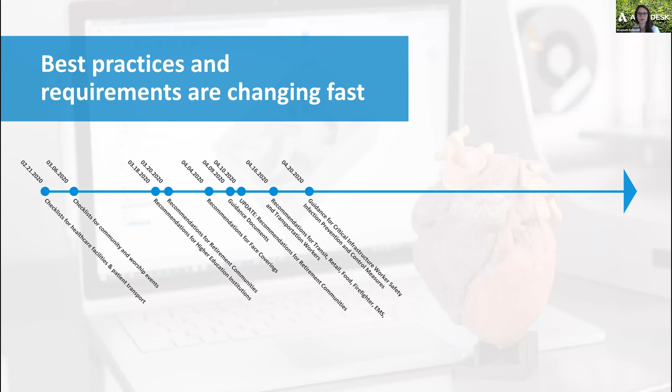So to start, one of the biggest issues in the AE industry, in addition to everything going on right now with COVID, is not only that requirements are changing, but that they're changing fast and they're changing often. So these are just a few of the recommendations set forth by the CDC. And as you can see, the recommendations are being updated regularly, and the recommendations vary by industry. So it's a challenge to keep up with all of the data.

The design and construction industry has a presence in some capacity with all industries and typologies. So this is really creating an overload of information and an endless cycle of modifications. So the big question really is, how do we adapt to face the challenges ahead?

And first, it's about understanding what we can do. NIOSH has released a hierarchy of controls as it relates to hazard prevention that narrows from the most effective to the least effective. However, as our industry does not have the knowledge or background focused on eliminations and vaccines of the virus, and it's not something that we want to find a substitution for, what we're going to be focusing on is how processes and tools can be implemented to help with engineering controls, administrative controls, and providing PPE. So as we work through the session today, we will be showing how various workflows and tools support meeting these control measures.

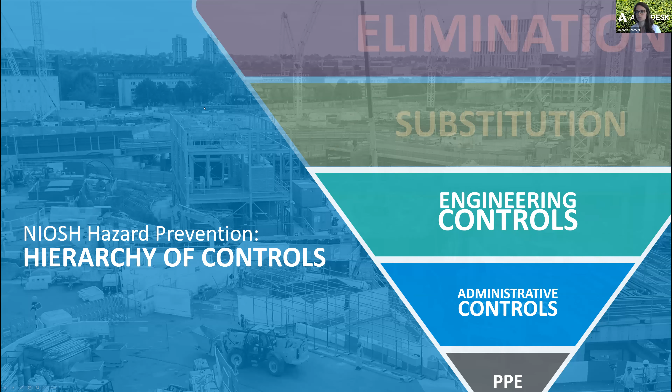Next, we need to establish an efficient method of working. We can be successful by taking the right references and resources as issued by varying agencies such as NIOSH, CDC, OSHA, WHO, AIA is coming out with things, and many more, and putting this information into a sustainable process. A sustainable process is going to be one that's repeatable, one that will help drive efficiency, and one that's going to lead with data decisions and give you analytical insights. Science is dictating a lot of design, engineering, and operational requirements, so we need to be able to make these decisions and push the design based on science.

We also need to support our processes by having the right tools. So in order to meet the requirements of driving decisions through data, the tools must support data inputs. It's also going to be in your benefit if you're operating in connected platforms, so you maintain data integrity and avoid rework as you complete your work cross-industry.

So before we jump into the processes and tools, I just want to set the framework for what we're about to explore. We're going to be looking at one project and exploring how 4 different tools can support redesigning for safety from the design phase all the way to facilities and maintenance.

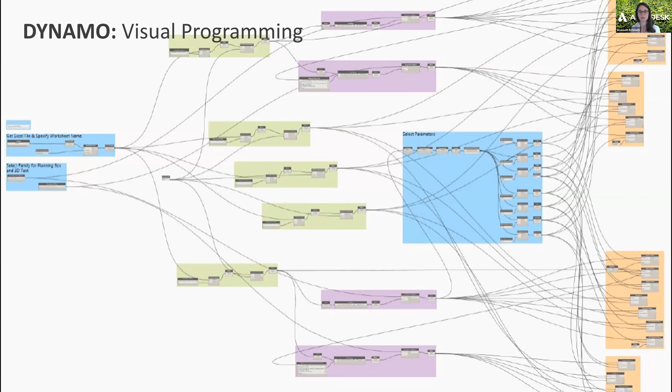This process relies on programming to translate the data. Dynamo is Autodesk's visual programming language, and historically running generative design studies meant users were working solely within Dynamo. However, in the AEC Collection of 2021, Autodesk introduced a new tool, the Generative Design for Revit tool. It's really just a user interface that allows designers to run generative design studies without having to engage in the programming interface and all of the programming language we just saw.

So this user interface is what we're going to be looking at today, in order to understand how generative design can meet the needs of redesigning for the era of COVID.

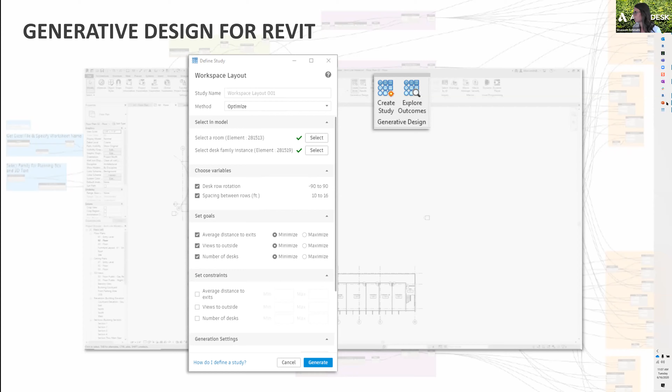Now I'm going to jump over to the product and we'll take a look at how this can operate. What I have open here is just a typical office building with a floor plan. I've opened up my FF&E plan, and you can see I have absolutely no furniture, fixtures, or equipment. So I have to redesign based on the new criteria.

There's a lot of rooms, it's multiple stories, that can be a pretty big task, especially when information is constantly changing. However, under this Manage tab, you can see Generative Design. It's grayed out right now because I have it already launched, but this is the new tool that will make this a lot easier for you.

When you open it up, you have the option to create and select a study type. These are all out of the box, included with the download and install of Revit 2021 from the collections. I'm going to show you how we can take the workspace layout and modify it based on COVID criteria.

So I'm selecting this workspace layout, and you can see it's really just a series of prompts. I can give this a name, so it's going to be office layout, we'll do it for Office 302. And I select a method — I'm going to leave it at the optimize method, which will try to optimize all of the different options based on the inputs.

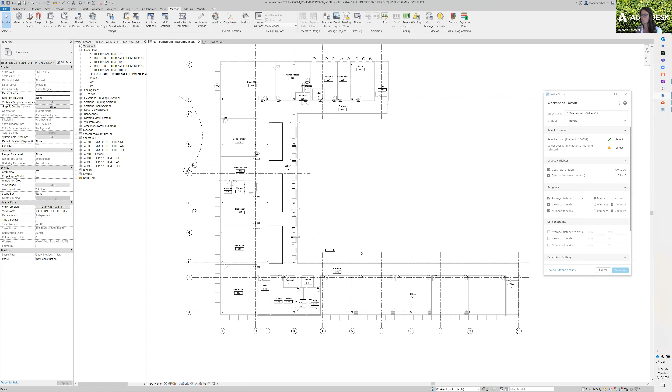Now, when we think about how this operates in the era of COVID, I know that this script and algorithm, just from working with it before, is going to create a benching layout — stacking these desks end on end for high density. And when we think about safety and social distancing, that might not be something we want.

So we have a couple of different options for how we can work with this. The first is we can modify the script. Everybody is going to have access to this — if you have the generative design tool, you have access to the algorithms it's running on, so you could go in and edit it.

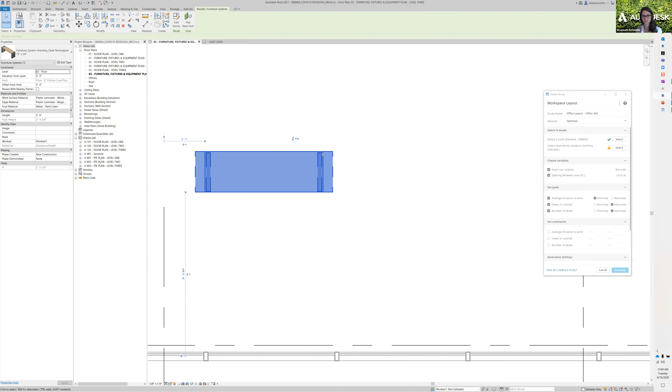The other option is just to edit the family itself. That's what I've done here — instead of just pushing the desks end to end, I've built in a clearance area for this desk, so there's a little bit of space added to the end of it. Now when it's end to end, I know I have that buffer zone. That's an easy way to still use this without modifying any of the programming, but still get a little bit of extra space.

So I select this desk, and here I have some variables. I'm going to leave these checked, because sure, we can rotate the desk row orientation, and yes, the spacing between the rows can vary. And we're going to set some goals.

Previously, when we talked about average distance to exits in architectural terms, it was something you might want to minimize just for ease of access and user experience — travel distance and egress paths. We want those to be lower.

However, when we now think about this goal in the era of COVID, an exit is a point of high touch. It's a lot of traffic, there's a lot of people going in and out, so you might not want to be close to it. So we can use these goals and these constraints to help us modify that.

Before, like I said, we might have wanted to minimize it. Now, maybe we don't want to minimize it, but maximize it, and refer back to the references and resources on what they recommend. So maybe we want to minimize it, but no closer than 15 feet for the average occupant, or maybe no closer than 10 feet, whatever the industry resources recommend for the industry you're working on.

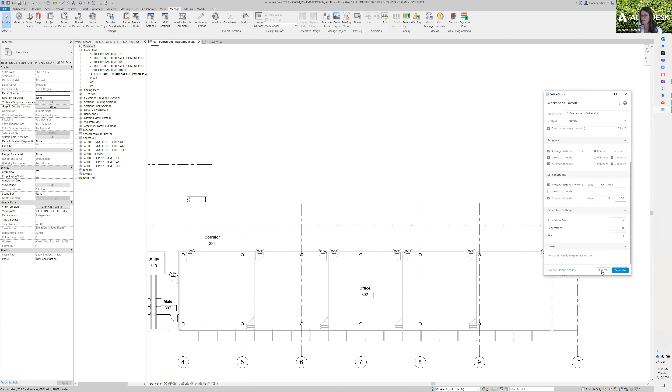From there, I'm really just going to tell the generative design tool how many different plans we want, and hit generate. It will take maybe 2 to 5 minutes to come up with the options, but because we're trying to show you 4 tools in an hour, we're not going to spend those 2 to 5 minutes. Instead, I'm going to cancel out of here and look at some of the studies I've already run. So this is the same office layout, and you can see I have 30 different plans, and I can sort these by average distance to exits.

Right now, let's sort it by the highest average distance to exit, because we want to start with people farther away and move down with people closer. I could also sort it by the spacing between rows. Same thing, let's look at the rows that are farther apart first, and then explore some options that are closer together. That's one way that we can start to look at this.

The other way, and this is where we start to talk about that optimization aspect, is when I come to the bottom here, I can filter all of these categories. Again, distance is king right now, so maybe I only want to see the rows that are farthest apart. Once I apply that filter, it's going to remove all other options. And again, average distance to exits - I just want to see the ones that are farther from the exits. Those 2 simple filters leave me with 2 options left out of 30 as being my best performers.

When I click on these, I'm going to get all of that data and reporting that went into it. So I can see what the average distance to the exit is for a worker, and I can also see my number of desks. So I'm about 14 feet away and I have 39 people. This option, you can see the average person is farther away from an exit and I have more desks. So we can make a decision based on this information.

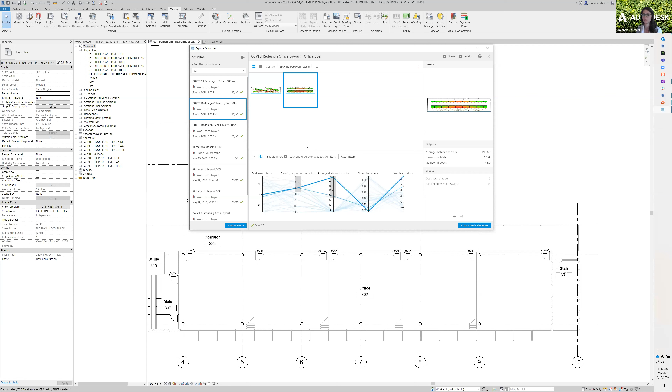The other benefit we're going to gain from generative design as we start to redesign a lot of spaces and do a lot of layouts is I can look at this room very quickly with an algorithm and see what works. I can also look at this room again with these operable partitions closed using that same algorithm and start to explore these options.

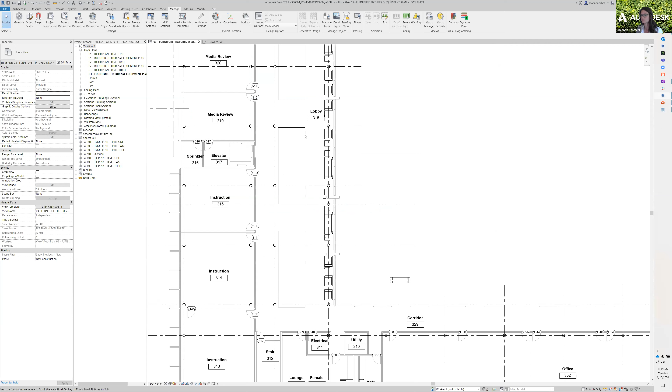And not only this room, but I can look at every single room in this office building. So this open office over here, I can generate layouts using that same technique, filtering down, understanding how each option performs, and quickly generate new layouts that are going to have those controls in place.

All right, so now we're going to look at the next step, and I'm going to give it to Edmundo, who is going to show us some of the other considerations that we need to look at instead of just where people sit, but how people move.

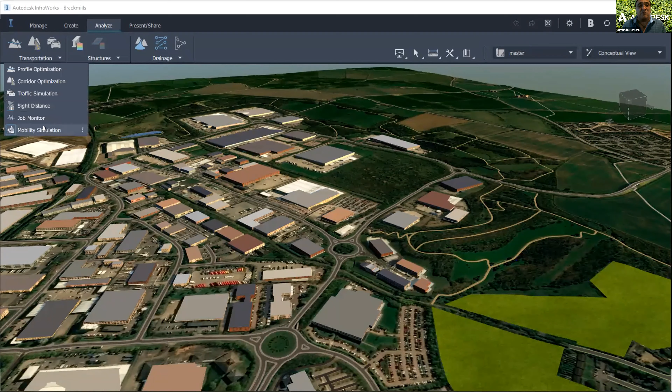So if you're familiar with InfraWorks, you just build a model of what you're interested in. If you don't have the data, you can automatically select a part of the world, and it's going to give you the basic configuration where you can import the model that Shannon was analyzing. Then from here, under InfraWorks, you go to Analyze, straight to Mobility Simulation, which takes you right to the area that you want to start analyzing. Again, you have to do this.

You have to use micro simulation. This is based on the gap acceptance lane changing algorithm. You have to really plan ahead on how people are going to be moving into the building, what times, everything.

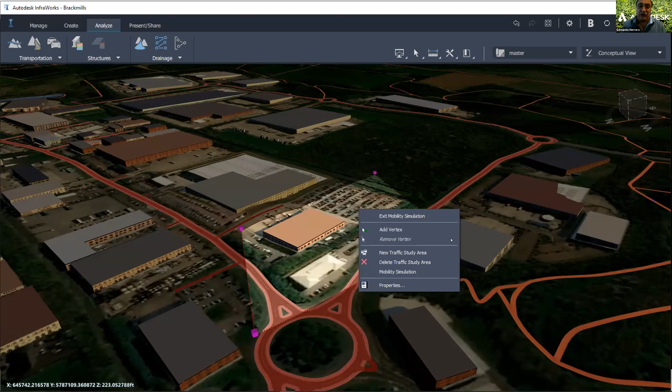Having said this, all you have to do is right click and move to mobility simulation. Once you do this—and I am importing a Revit model into the InfraWorks model—go straight, you can see it right here up at the top. It's mobility simulation, that's where it is. And then there's no restrictions whatsoever.

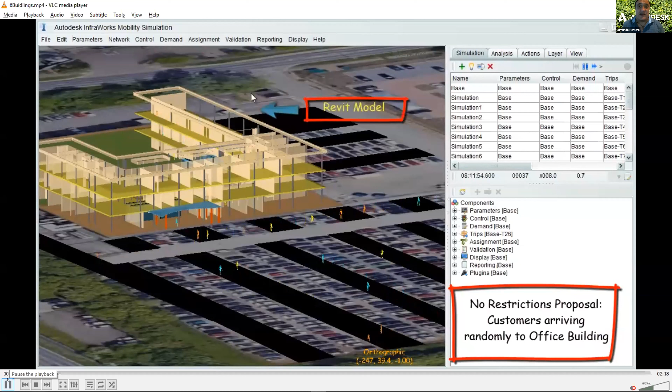It is always best practice in micro simulation to know the existing conditions. So we're going to be studying right now only the existing conditions, the way people randomly arrive into a building. We'll move into the safety guidelines provided by CDC in a second, okay? But it's always great to understand what happens. So this is just, at random, a Revit model, but it's far from being just pure graphics.

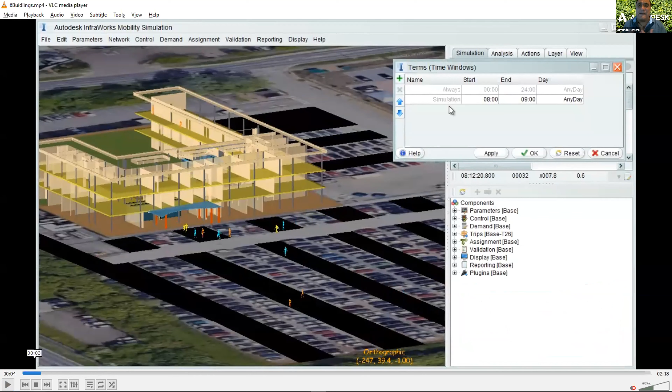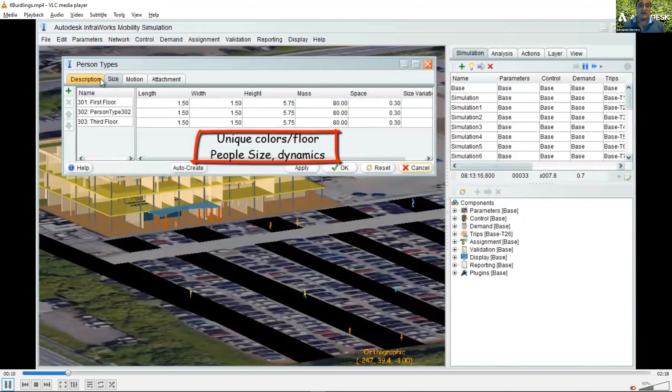These are very complex math done in a very simplistic way where you can immediately get results. That visual feedback is exactly what you're after. Look at this—you're modeling, and under existing conditions, people arrive from 8 a.m. to 9 a.m., and that's what you're seeing right here. Then what am I doing to understand the behavior a little bit better? I'm assigning unique colors per floor, so people on the first floor will have different colors than the rest of the floors. So you have all the physics, the length, the width, and the spacing that you want to do.

It has a south entrance—Shannon showed it—and a north entrance. Once you start running simulation, you can see all the results being dynamically updated, okay? Here, using the Revit model, I can even change views and start analyzing as people move in. So the information can be globally understood from the dynamic output report, or you can even select an agent, like I'm doing here, like a person, and it tells you exactly what is the waiting time, what is the walking time, and the type of person that's arriving at any point. So they're graphically dynamically updated.

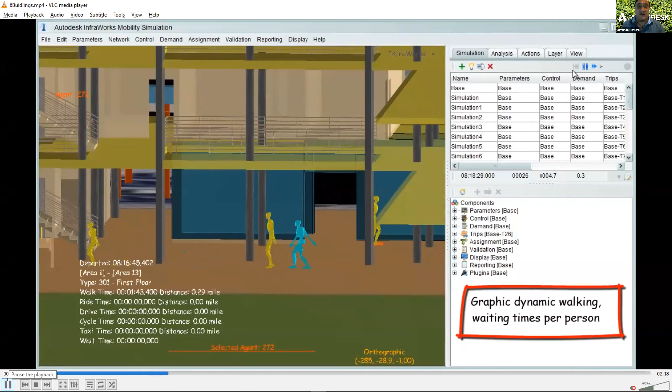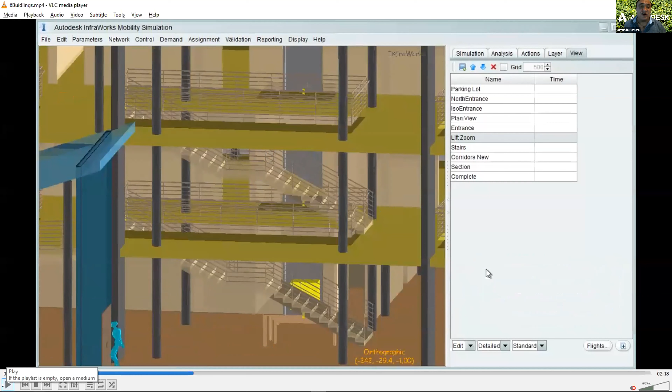Now you can even take it a step further. Based on the Revit model, you can also include elevator simulations. It includes the passengers, the capacity, when is the next trip going to be scheduled—every single element that relates to the elevator, you can see it. And then right here you simulate, and you start seeing people getting off on the second and the third floor.

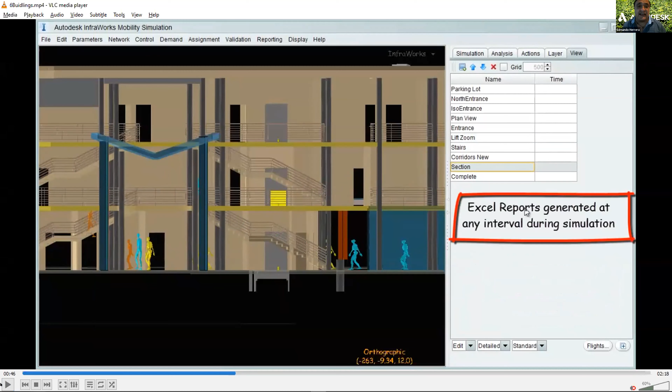So these are the existing conditions. And of course, not only the visual feedback—the immediate visual feedback you can obtain from simulation—you can also create and generate Excel reports. Once you do that, at any interval, you can certainly do it.

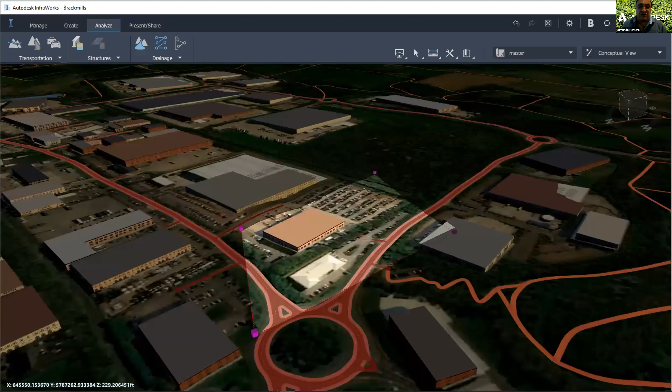Now this is fine, this is great, but what happens—let me go straight to the micro simulation, and this is the product itself, live demo. These are the new conditions, the new safety guidelines. So rather than people arriving randomly, what you do is right now establish different terms.

Since I cannot just—running the simulation based on the existing conditions, you can see people already not honoring the social spacing. So what you must do is plan ahead.

So I've got different schedules per different floors. I'm going to make some arrive before, and then for how long must you do it? So you have to understand that you have to organize the groups, you have to stagger them, and that's called computing the frequency on how often the groups would be released. So the staggering schedules you have to compute, and they must always be validated for.

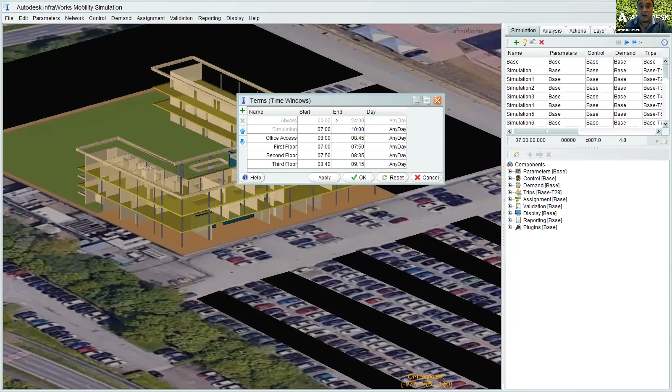Again, under here you've got your own type of person, first floor, second floor, and again we set the physics—what is the length, the width, the height, and of course the spacing. But once I hit the spacing, this is critical because now I must honor it.

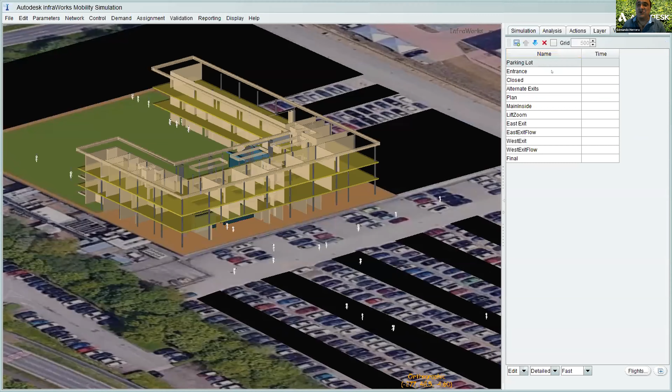And then you can even start running the simulation, look at the clock, and instead of 8 a.m. to 9 a.m., it starts right here at 7 a.m. As soon as you hit play, you can start seeing the first floor being occupied. Now here, if I switch to the entrance, I can zoom in and keep on playing the simulation.

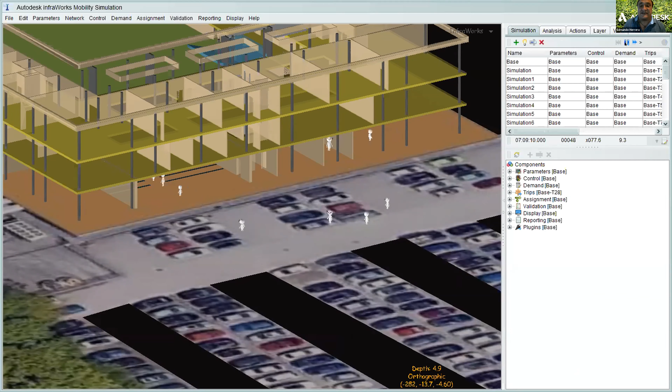Look at this, now they line up. You can't get exact ingress times just from door capacity, you have to compute and align them in a single line right now in order to have control and honor social spacing. Once you do that, you can start seeing them separating themselves. Okay, that's the entrance.

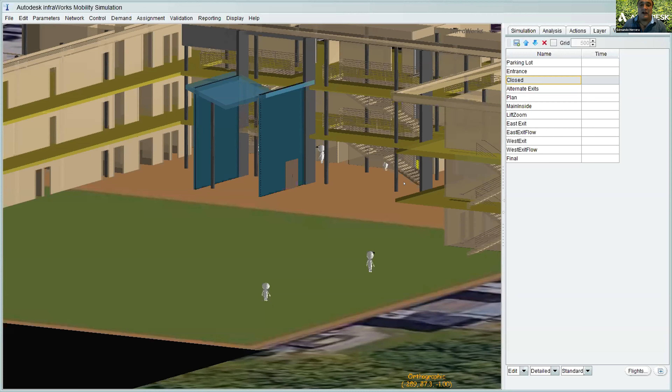I also wanted to show you this: as part of the new security guidelines, you must always avoid two-way traffic whenever possible. To do this, I leave the south entrance open but shut down the north entrance to avoid two-way traffic. Once I do that, I also open these two wings, the exits on both wings, so that people on the left wing occupy only the left side of the building, people on the right wing only occupy the right side, and the main entrance is open for the front part of the building.

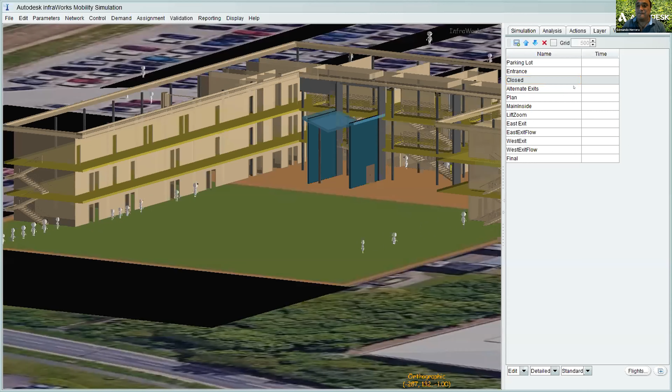So if I simulate, I can even slow them down. Once I do that, these are the alternate exits. And of course, if I see it on a plan view, I can see that stochastically, meaning based on probability of demand, not everyone's going to be arriving at the same time. I can certainly understand this.

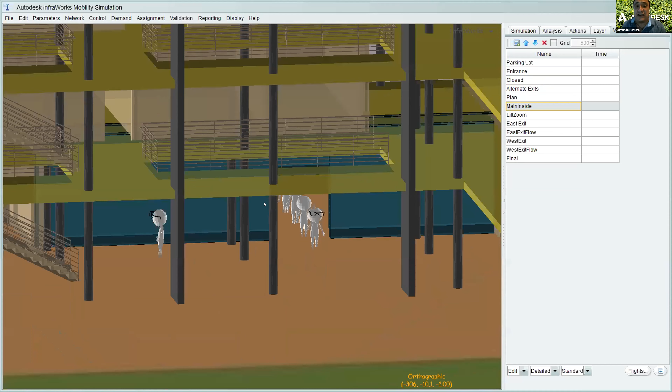On the main inside, look at this. You can even import your own 3ds Max characters into the building. It doesn't really matter the way they look, they look fine, but the physics and the mathematics are maintained here, which gives you the walk-in time, the waiting time, and everything in between.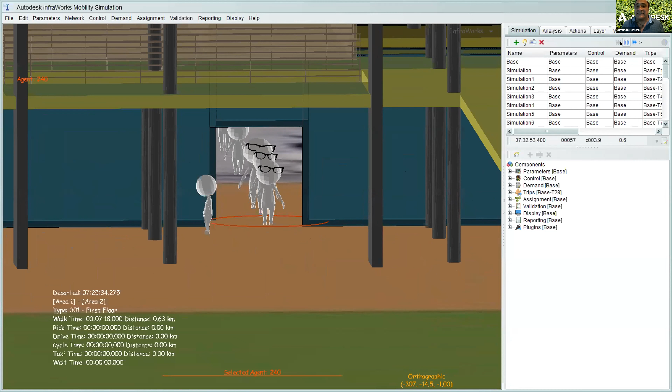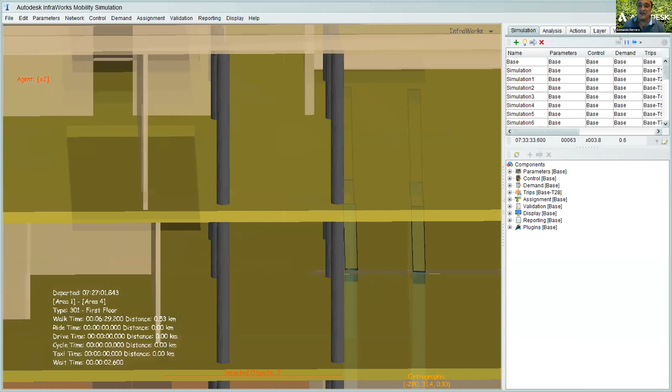Now you can see that 732, that's the simulation that's also needed. Now you can even follow any agent. If I select this agent to be followed, I can track it, and as I run the simulation, I can see right here the way the person is moving. Okay, now I'm going to escape from this. Here, there it is. Let me go back and change my view here.

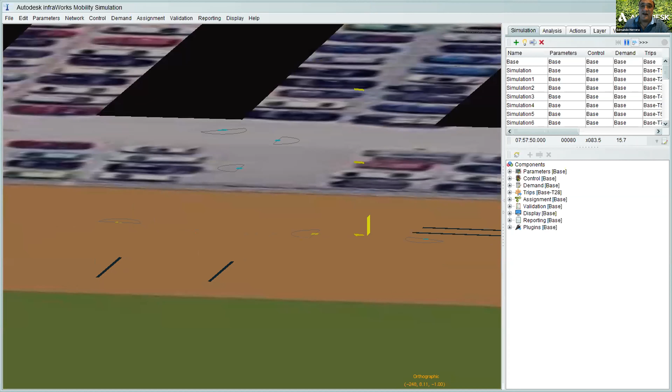As soon as there's no people occupying the elevator, why is this? Because at 7:38 I said from 7 to 7:50 everyone was going to just be occupying the first floor. Now if I speed up the simulation, fast forward it to 7:50, you can see different types of icons being assigned to each person as you simulate. Going back, once you start going into the second set of elements, now they either walk up the stairs, and the capacity of the elevator is reduced from 8 people to only 2 people. You can see you have control, and everything is dynamically updated.

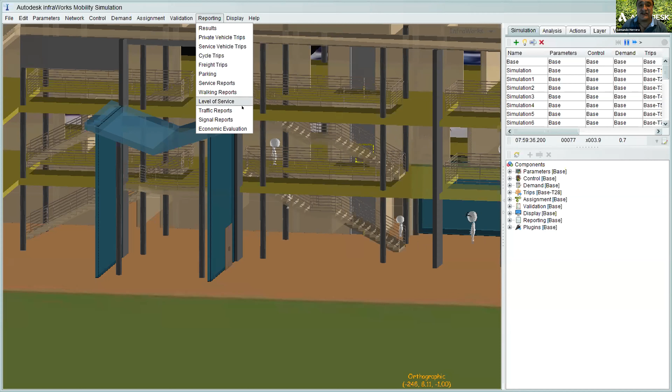Now, one thing you always have to be careful about is checking the levels of service of walkways. This is immediate visual feedback on a very complex problem, made in an extremely simplistic manner, because you always get that visual feedback. No matter what happens, you can review once people start getting close to each other, and you always have to justify the spacing, reviewing throughout the entire simulation. So level of service S is not the velocity, but S is the spacing in between, so you always have to be extremely careful about this.

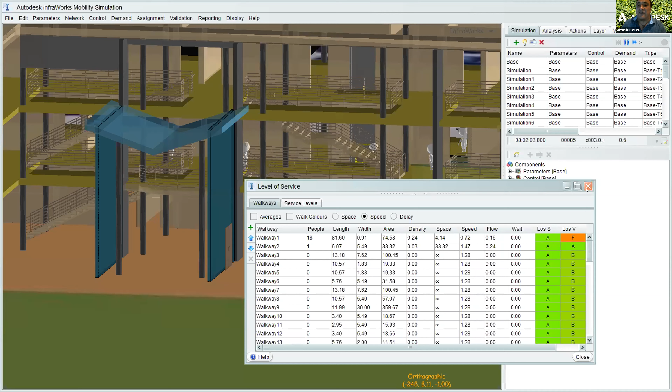And of course, you can speed it up and analyze everything as it is. You can see that the north doors being used in all the entrances are also automatically open, so you start understanding and always provide this social spacing based on the calculations that Shannon presented. Okay, well, that's what I wanted to show. I'm going to turn it over to Dave now.

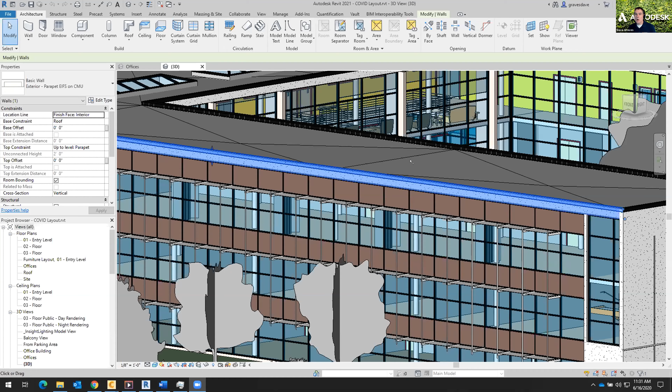On the screen is the same Revit model that we've all been working with, and that's kind of the key. We can use one common source of truth for data to start doing this, and we can bring this data directly into our CFD tool. It looks something like this, CFD stands for computational fluid dynamics. Basically, we're going to visualize the flow inside of the building. I know typically people use things like ASHRAE calculations, which are great, but this gives you another level of detail to really explore how efficient your HVAC system may be, or desk layout and people interaction.

If you haven't seen CFD, most people think of it as a pretty daunting exercise, but it's really pretty straightforward with our solution. Basically, when the model's in, you work left to right. The first thing we do is assign materials, so I have some air volumes here. Inside of the building, here's an airspace. What's really nice is if your model is airtight in Revit, we automatically create the fluid path for you.

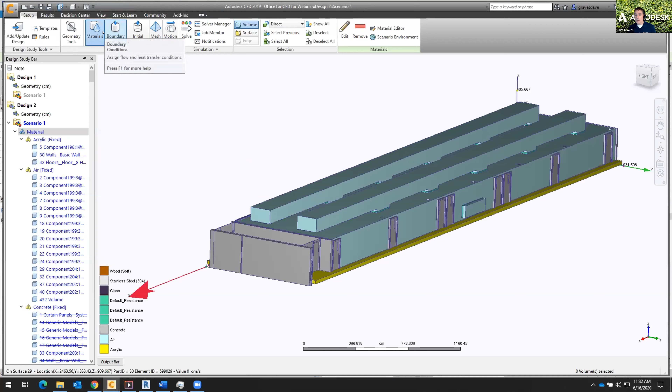Once we set our materials, we just follow this ribbon left to right on the screen. So, what are our boundary operating conditions? In this case, maybe I could put something like a flow rate in here. We can talk about doing things with contaminants in a little bit, but what do I know about the building and how it's going to perform? Typically for returns, we'll just have it open to atmosphere, but you could have a closed loop system. It's definitely within the capabilities of the tool.

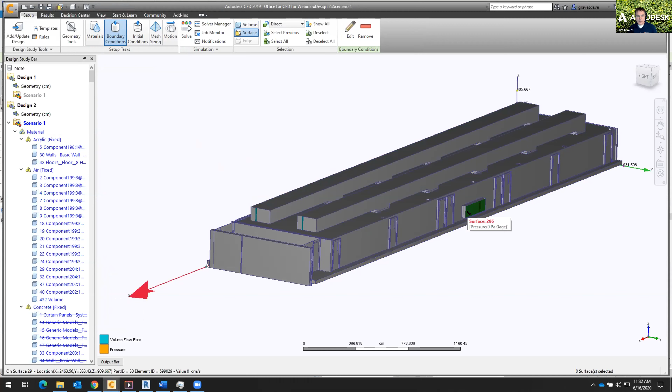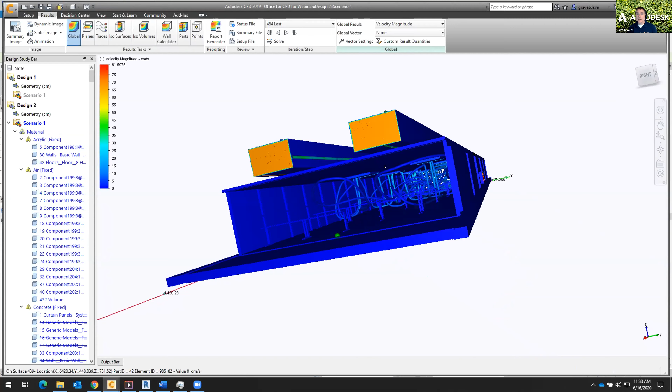Once I run these results, we're actually able to start visualizing the flow paths in here, and this is one of the critical things. I think it's really easy to start looking at what the air inside of this building is doing. Let me change this view for a second. This perspective gives us a nice little viewpoint. You can kind of see where the air is flowing, and these are something called particle traces. They just trace the air throughout the entire system.

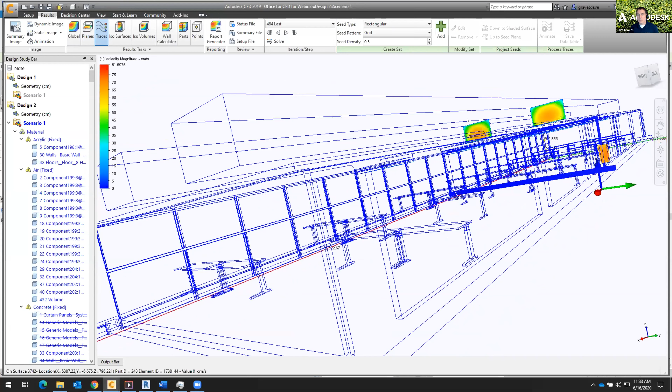Just to show you some of the other visualization capabilities, a lot of people will use something called a cut plane, much like a section view you might have inside of Revit if you're doing cross sections. Here's a plane, and I can take this plane and slide it and move it anywhere in the model. There's my glyph here, so I can see what the velocity looks like if it's coming out of those diffusers, what it looks like over the desk and things like that.

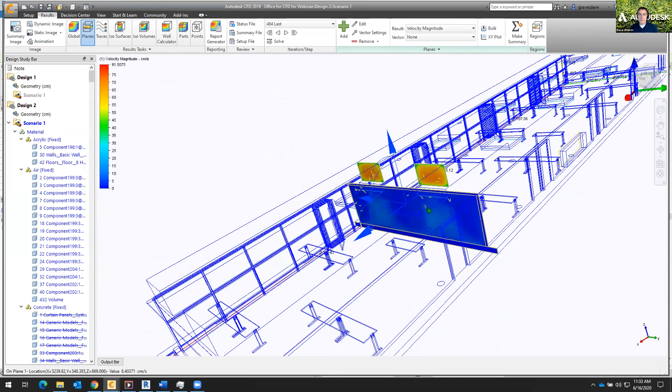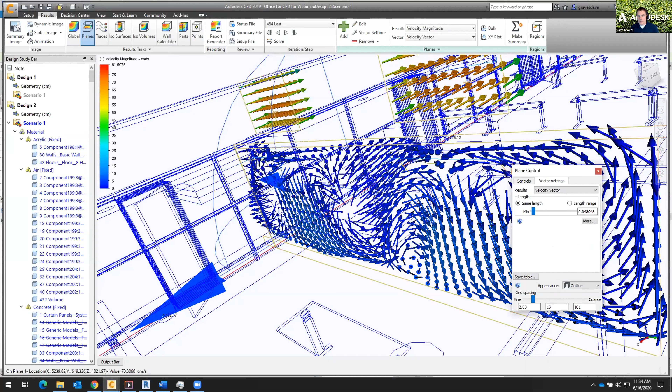We can go ahead and put some vectors on here if you want to see the direction of the flow. There you go, you can kind of see some vectors. Again, you can have multiple planes, you can change the spacing, we can look at different quantities. Anywhere in this model, if I move my mouse over, I can get real numbers, so I can get qualitative and quantitative information out of this model.

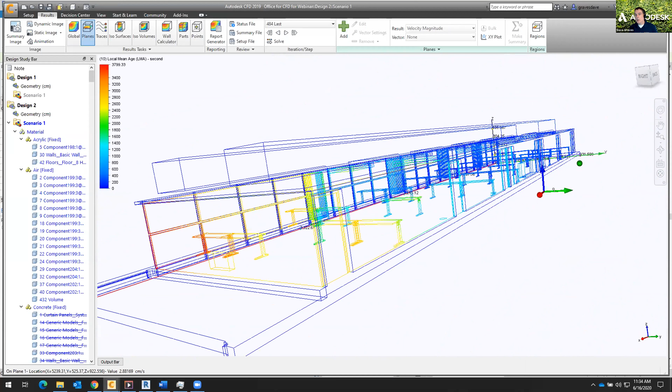When we start talking about COVID in general, contaminants and pollutants, one of the tools we have is something called an iso volume. And one of the quantities you're probably familiar with is looking at the local mean age of air. We look at our ASHRAE calculations and we get an estimate for what that's going to be.

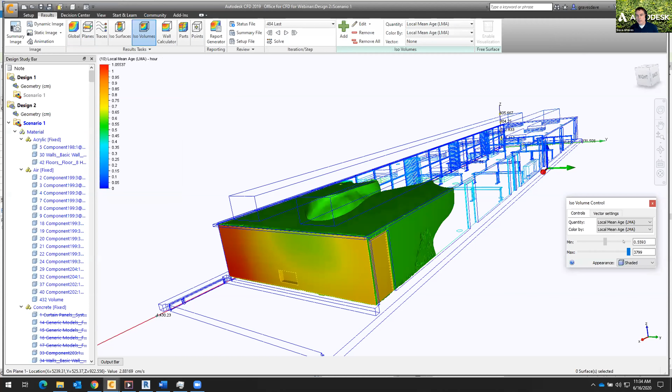If I want to dig in deeper, I can shade any particular model at a given range. By the way, this is in seconds, but it's easy to convert on the fly to something like hours if I was looking at certain hours. As I slide this in, I notice overall my calculations might meet all the criteria, but this corner of the room is pretty bad. There's maybe no return over here, and we're getting a lot of recirculation.

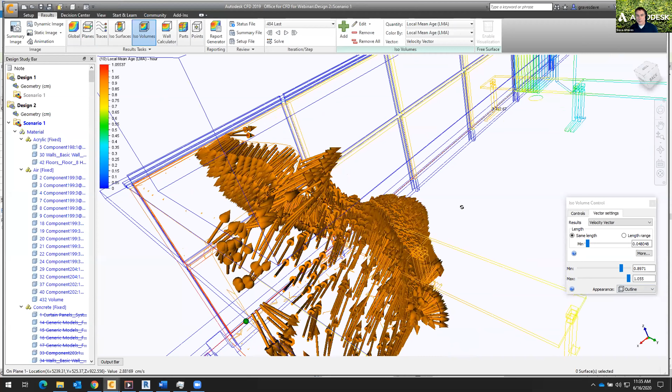Another thing you can do is get 3D vectors really easily by turning this on. Something I like to do just to visualize what the flow looks like in that area. You can see it's kind of doing a lot of swirl here.

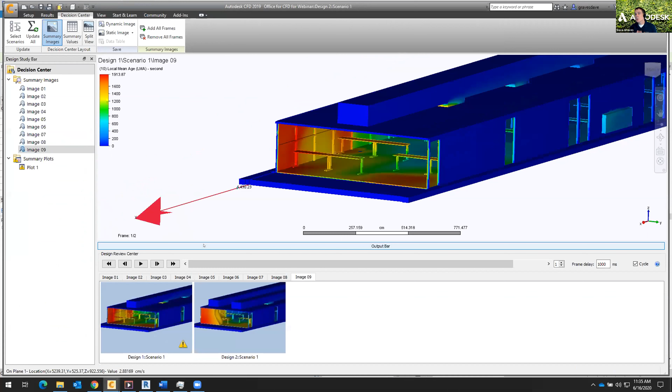The beauty of our CFD tools is, what if I made a change? In this case, I had maybe a complicated two sets of air conditioning duct work here. What if I did this as a single one instead? So here's the original one I have, and using the same model I can compare those two, and see how I can reduce that potential risk of recirculation in the area, which should give me some healthier, cleaner air for my occupants to be immersed with.

If I want to dig in and do some deeper things, like looking at how airflow behaves when someone coughs—this is a school environment, but same thing applies—someone sneezes, someone's talking hard or breathing heavy, we can use these particle traces. What's really nice is you could assign mass and gravity to them, and you can see in this case the person in front of the other person is maybe something at risk.

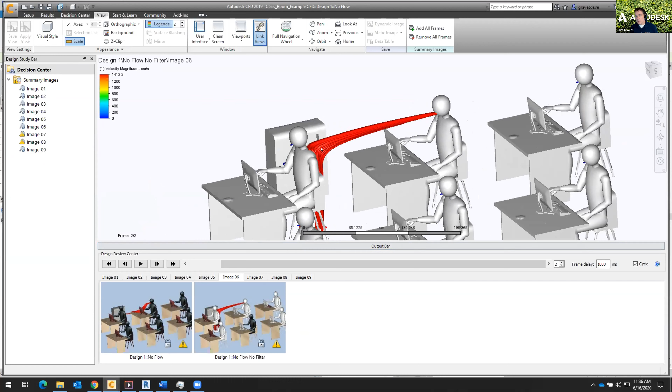The beauty is maybe I can put something like a little filtration unit in here, and you can see that is going to pull the contaminants away from the person in front of them. So I can explore different things like that.

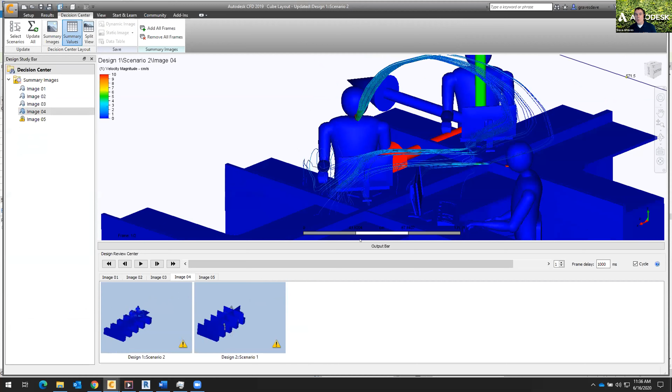Maybe I can look at different desks as well. So if I'm in this office environment, this is an area where people maybe are closer than they should be, have no choice, but there's no dividers in this desk. Well, what if I just put a simple divider in the desk? What happens? So I can do these comparisons.

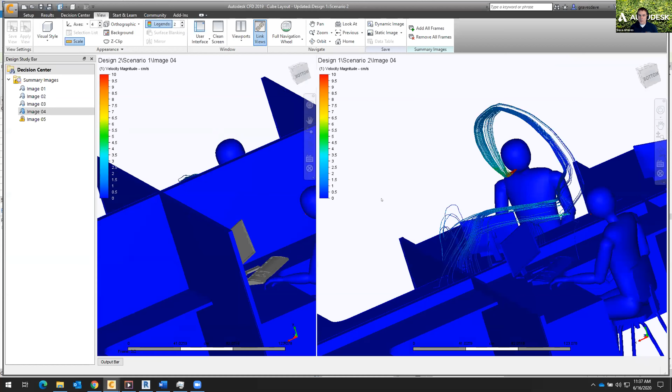What's really nice is I can actually do these kind of side by side if I wanted to. So you see me panning through these, but I could compare them side by side and see. Any of these changes I can explore long before I have to physically build or change anything, whether it's a rework or a new building. I know when I go out in the field and actually spend money to upgrade something, it's going to work the first time.

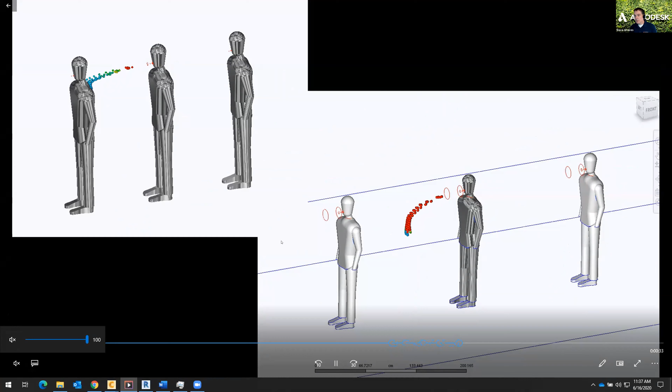Some other quick things we can get into: you can explore different things like spacing. You can see these people are maybe 6 feet apart, maybe 4 feet, and you can see potentially where contaminants go. Edmundo mentioned something where you don't want people going the same way in a building—you can see the flow paths of people coming into this building as well. So we can evaluate a lot of complicated things like that, if that's the level of detail you want to get into.

We could spend a lot of time on this, so if anyone wants to learn more, just reach out and we're glad to spend more time on it. But with that, I'm conscious of time, so I'm going to turn it over to my colleague, Daniel.

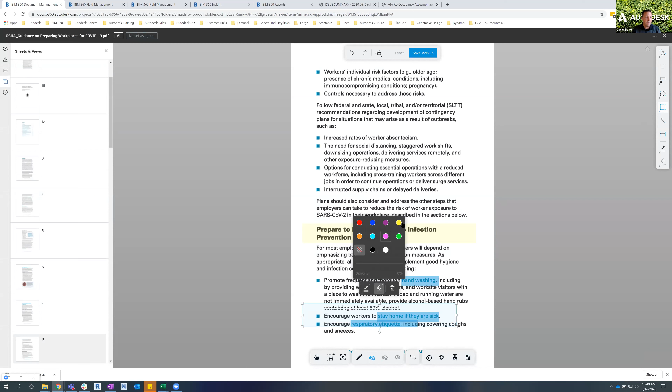It's not just a markup we're adding on this page—it's going to be so much more than that, because when we say cloud an area, we can modify some of the information about what that cloud might look like, or what this markup might look like. And it's always going to be retained. When I save this markup, it's retained, and that is the integrity side of all of the data. So we can see the different markups on all the different pages.

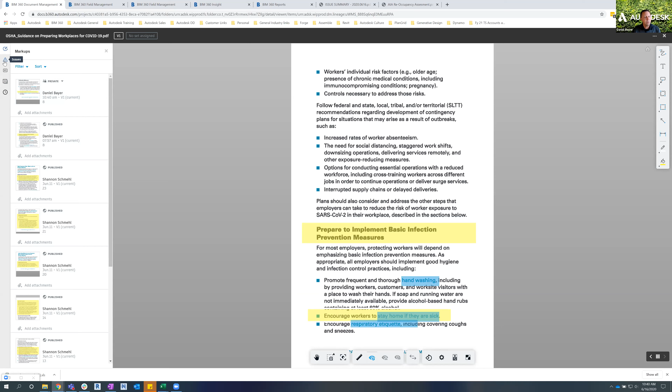But to extend this capability, we can use our issues tool. With issues, we can really create more of that accountability approach on the project. You can define what it belongs to—it would be an issue type. I like to define issues as really just questions you don't want to lose track of. You can eliminate the multiple Excel files you may have used in the past, and now just open this up to one location to manage all that information.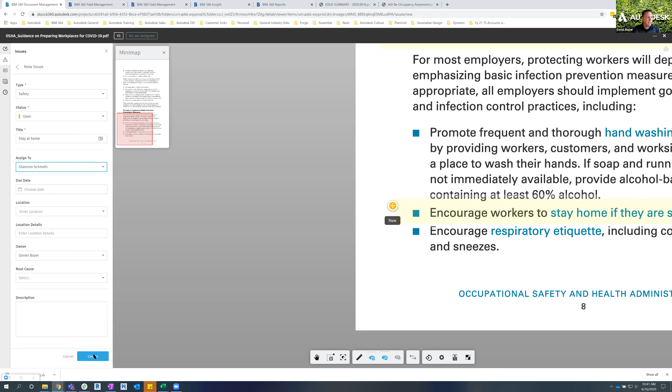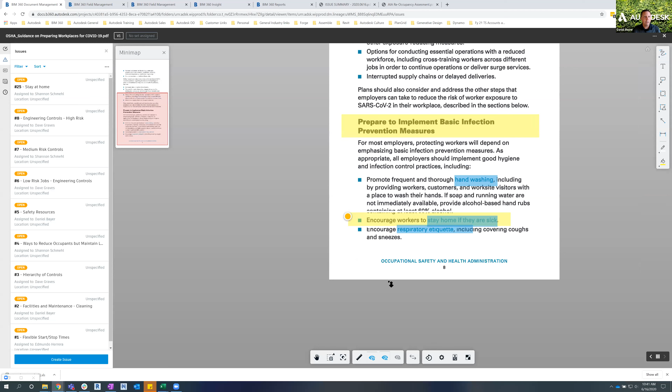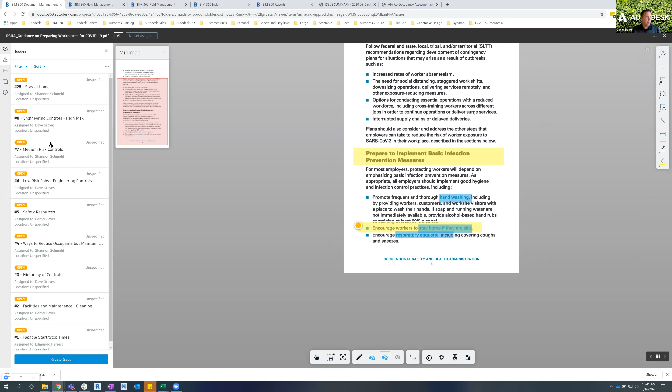You can give it a simple title, then assign that to an individual on the team within BIM 360, choose a date if you need a response back, and define other data. So I can create that, and now I've got a pin that can always take me right back to this location inside document management. You have full visibility of all your information always accessible, and we can see the issues that show up on the left side of the dialog box, and jump to any of those issues at any time to look at that data.

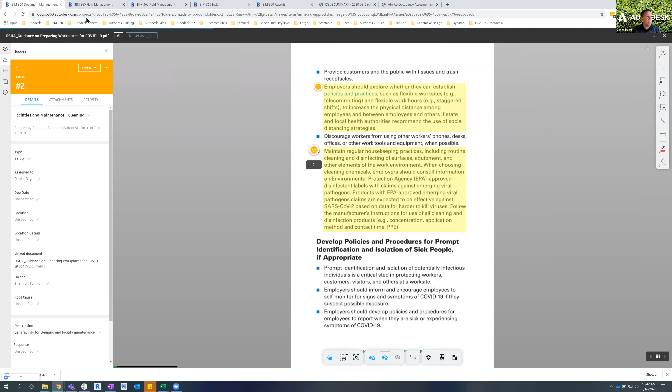Continuing to move downstream into field management, you can see a variety of the modules we have available to us. I've got a window already open in field management, and a couple of things I want to talk about.

How can you start to use some of the AIA forms and pull those into BIM 360? I'm going to show that example. You can also look to OSHA or really any of the other safety forms. On our Autodesk site, we've got a safety checklist as well for housekeeping, say in a hotel environment. So all of that's available to you.

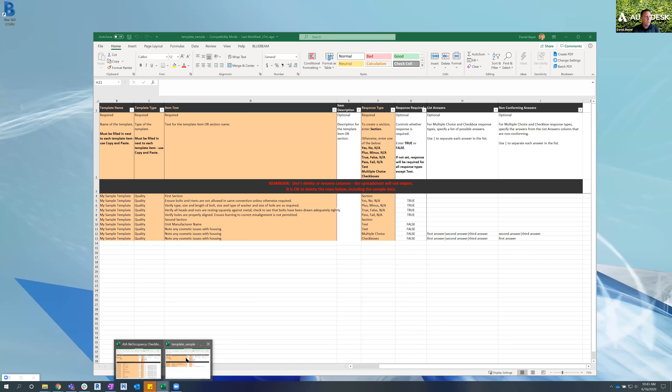I'm going to begin with the templates, and we can bring those templates in via Excel. They can come in from our classic field, or you can create your own template. We also have a template sample, and I'm going to open that up right now. Here is the sample that gets downloaded—you simply replace the information and then pull up the new one.

Here is a template I created based on some of the AIA reoccupancy assessment information. This is not all inclusive—I did about 5 sections out of that assessment, and we're going to open that up right now.

So what I'm going to do is, I have a template here. We can see it. I can create the checklist and assign it to someone.

Or I can jump into a checklist I've already set up. I'm going to open this one up. We have the different sections that have been created. I'm going to go into section 3, where we start to cover the big questions about where you're beginning—what does programming look like, what does the beginning of design look like.

The unique capability here is that you can produce reporting on it, which I'll show shortly, but you can also begin to ask questions as well.

As you work through that checklist, some things may be essential, some things may be desired. You can make a second pass into it. You can even add implemented—it was desired and implemented.

Or you can choose an item that hasn't been implemented, and you have the ability to create an issue or ask the question. There's also an auto feature built into checklists that would auto-create an issue once you click a non-conforming item.

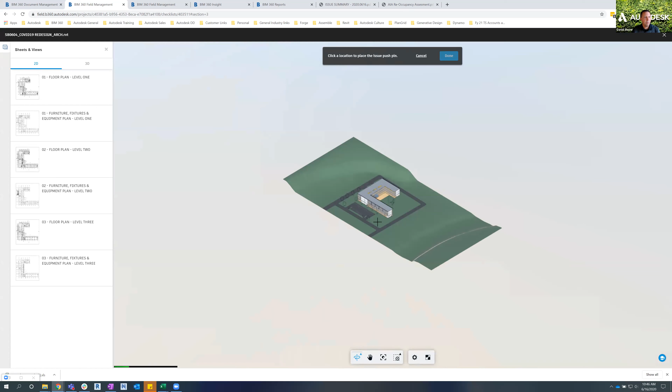You'll also see that we've got the 2D sheets associated, so anything that's been placed. I'm going to place a pin. It's been initiated, and it's connecting itself back into the checklist.

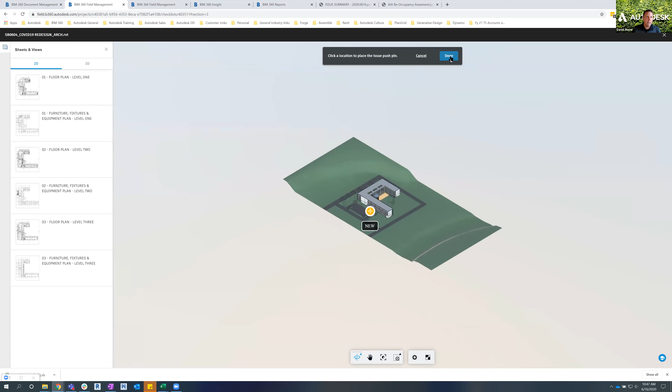In this case, you would have gone out to an appropriate sheet or view in the model and dropped that pin. I'm just simply dropping it based on opening up the model. I hit done, and then continue to fill out the remainder of the information.

With all of this information, the integrity of it being held in one place, it's also going to be deposited into our overall issues list. So not only do we have the checklist that can be pushed out to reports, we also have the issues list, which I've had a window open for, that we can sort and filter very quickly to view specific checklists.

So here we have the COVID checklist, and it's going to filter out those lists.

My window has been sitting here, so it's just refreshing itself. We're going to see the issues pop up, and when that refilters, I'll do that one more time. Let's go down to COVID, and we'll now see those sorted and filtered.

From here, we could do a direct export. You could send out a CSV or a PDF report, and it's going to be this filtered version.

As we look deeper downstream into the reporting capabilities, we've got analytics and insight, one of the unique cornerstones of BIM 360, where all of the information being captured is also surfaced here in our Insight module. We have an overall risk score, design specific, project control, schedule, quality, and safety.

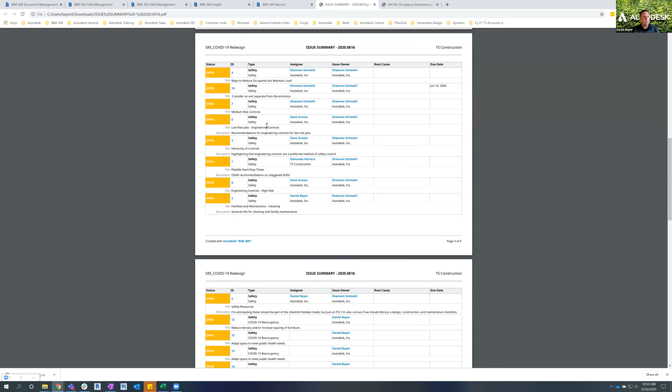Some of the reporting capabilities - here's just a summary report of issues that have been created. This is the look and feel of what you're going to receive, and it's color coded based on the current status. Then in a detailed report of a checklist, this is what that's looking like.

So you're going to have all of your conforming and non-conforming items identified. Again, this is a full detailed report out, where it will also have hyperlinks back into the information.

Now I showed this on the desktop version or in the web browser on my PC, but certainly all of this capability exists for the mobile device. In fact, it was mobile-first around this capability, and functions with walking the job site, snapping photos, and very quickly analyzing your facility.

All right, so we are going to move on back to Shannon.

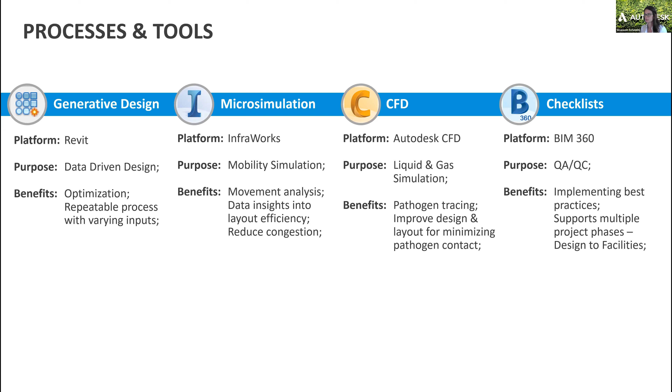So as we talk about a process, just to emphasize, it's always going to start with the background research. We need to be looking at the right resources, the right references, talking with the clients about what the scope of work is to be changed, the budget, the role of technology in creating a touchless environment. Also considering the control level of the space—is it a shared office building or a standalone? All of these are questions that need to be explored before we start diving into the tools.

But from there, they really work hand in hand. We can redesign a spatial program, and then use that same model and design for analysis—running mobility simulations and CFD to get more data and insight, then go back and make tweaks to the design, and analyze once more before implementing QA, QC to check us along the way at different milestones and make sure we're meeting those guidelines.

And those checklists don't end with just assessing the guidelines—they can also be used for facility maintenance, like checking whether cleaning crews are meeting all the requirements. So this is just a proposed workflow on how these tools can work together to help you work more efficiently, so that you're able to help your customers.